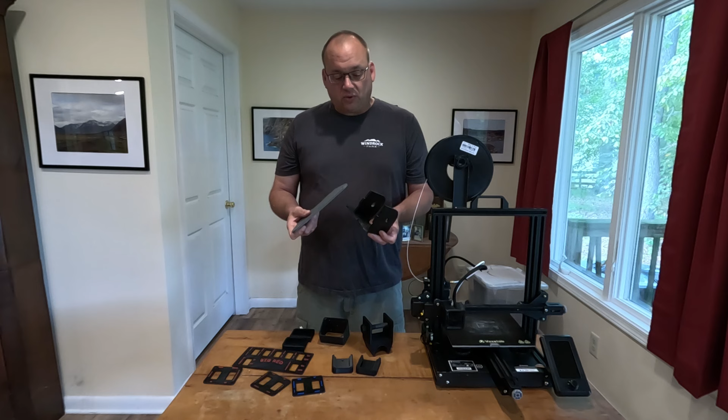More mock-ups—like I said, anything you're trying out, and once again these are designs I'm not using anymore. But the neat thing is, before I could actually send these designs out to be laser cut, I can 3D print them and test fit, make sure bolt holes line up, and make sure the bracket works before I spend the money and time to send them out to get laser cut.

Another really neat one is I can make switch plates. These are actually pretty neat. This one I made for Big Red. I still haven't put it in, but it sure does look neat. You can do raised lettering and do lettering in different colors.

And that's actually another thing I'll tell you—even with this 3D printer I have right here, I actually printed this using my other machine. I have two; this is a small one, and I have a larger one. I had to print this one on my larger one. But you don't need a special dual extruder or dual filament machine to do two colors.

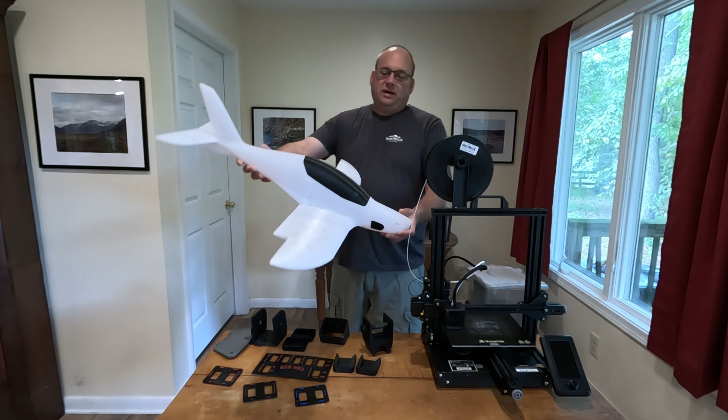And once again, another one—I was actually pushing my limits to see exactly what I can print, and I downloaded free files to 3D print a remote control airplane.

I never did finish it, but I really wanted to challenge myself on the complexity of the prints. So this is actually pretty neat. And of course I didn't print it in one piece, I had to print it in multiple pieces and glue them together. But this is just a real testament on how versatile these machines are and what they can do. When I say your imagination is your limit, I mean it truly is. You can really do a lot of neat stuff with this. But that was... maybe I'll finish that one day.

So now we're moving to the final part. I know you guys hopefully are amazed and impressed with everything you can do with this. And now, unfortunately, this is something that comes into everybody's mind these days: the cost.

Most of the time, technology, everything is incredibly expensive. My plasma table, which you've seen in other videos, is downright amazing and is actually one of the most affordable plasma tables you can get, and it was still a lot of money. Worth every penny though, but still a lot of money.

But for this one, actually this 3D printer right here is a replacement, because I've had another one identical to it, same manufacturer, more or less the same one. I've been using it for over a year and a half. I can't tell you how many pieces I have printed with that printer. I broke that printer probably about 3 or 4 times, and I burned the heating element out in the tip, so I finally just broke down and bought a replacement.

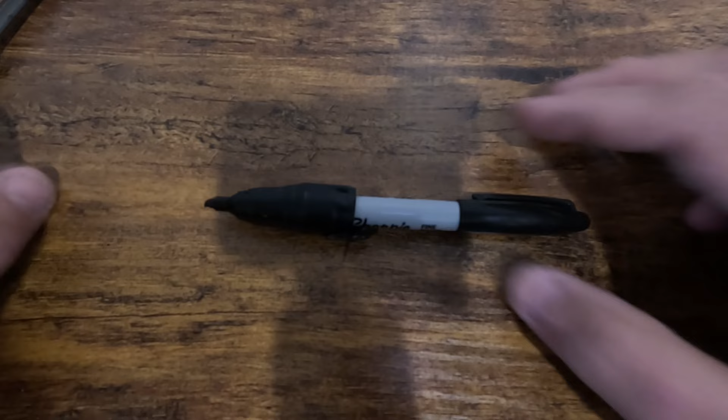All right, here we go. This is my idea. Well, if you watch the intro to this video and my others, you're going to notice that I use my CNC plasma cutter to actually use a Sharpie and draw on a piece of poster board. Now, this is how I did it. To get the Sharpie in there, all I did was wrap it with a lot of electrical tape to be able to hold the marker.

So now it worked, there's no denying that. But the biggest thing I was doing was verifying that the idea worked, that this is definitely not the best way to do it. It's not the final way to do it. But I just wanted to verify that, number one, I could hold a Sharpie, and I could write a G-code that I could actually draw on a piece of paper or anything else. Even though I made a pretty cool intro with it, I do have some other uses that, if you follow this channel, you'll probably see at one time or another.

So once again, that's the idea. Now I want to 3D print a part to hold the Sharpie. So we're going to set that aside. This is a Sharpie without tape on it. I want to be able to make a piece that goes on this section of the Sharpie that I can clamp in place of my plasma torch on my plasma cutter. So that's very doable, and that's what we can do.

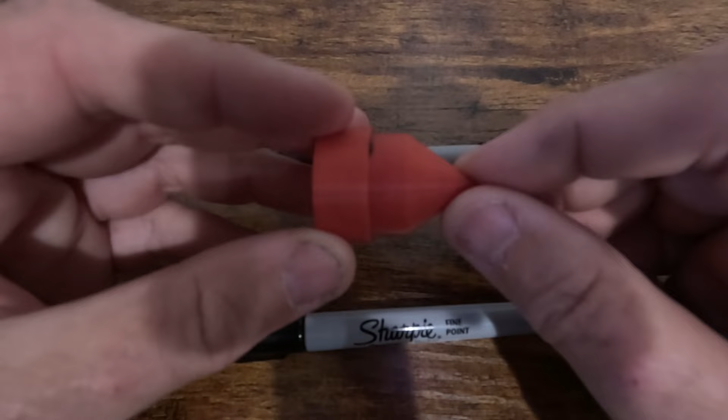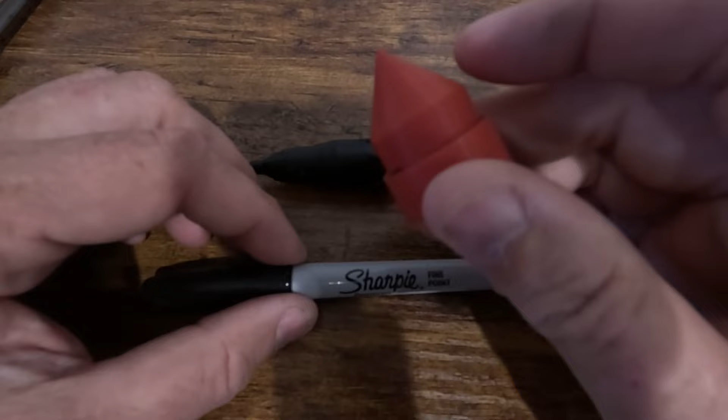So to start off with, I'm going to show you a few other parts that I've 3D printed. This is just a simple pointer. I actually clamped this into my plasma cutter, so I can use the point to line up a workpiece. So that's the purpose of this piece right here. I drew this up on CAD and I 3D printed it, and it works very well.

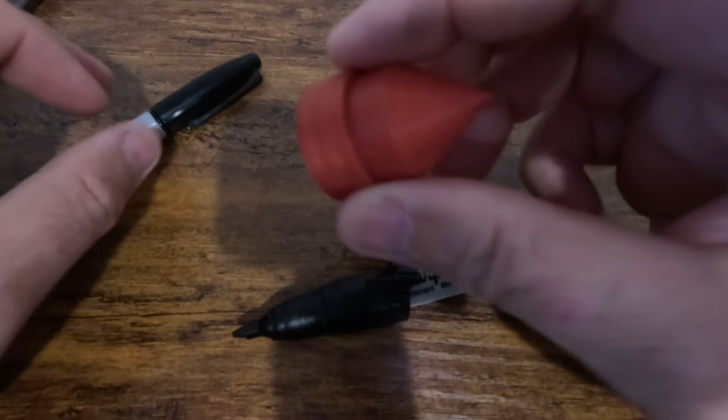So what we're going to end up doing is take this similar design. I'm going to take measurements off of this, and what we're going to do is stop this part right when it starts to taper down to a point. So it's only going to be about that long, and then we're going to put a hole in it, so the Sharpie can actually go through the center and the tip will come out the end. That's more or less what we're planning on making. I'm going to take measurements off of this because I know this fits in the holder for my plasma torch on my table, so this should work very well.

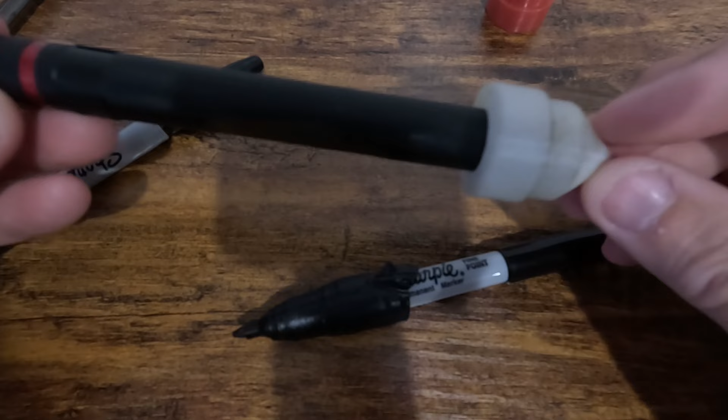And then here's another one that I made. I use this for the same purpose of aligning workpieces up on the plasma table. Basically all this is just a small flashlight, and what I can do is when I turn the light on, the tip lights up. It's a little hard to tell, but there's actually a hole in the middle of this.

So the hole lets light through, so I can put this in, and rather than having to line up this tip on the workpiece, I can shine a dot on the workpiece so I can center it up, or I can run a test pattern just so I can see exactly where it's going to cut. So I know if I'm too close to an edge or another part, I can do that before I actually light the torch up, run the program, and screw it up and waste a piece of metal.

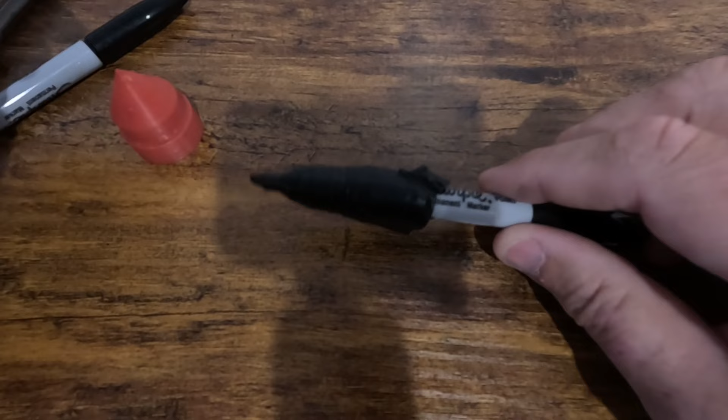So like I said, these were two items that I printed out on my 3D printer already. So, and then also, anyways, that's what we're gonna do. So we're gonna jump on the computer, get onto CAD, and we're gonna get it started.

All right, now that we're on the computer, let's get this party started. So we're gonna start. We're gonna open up Fusion 360, which I already had it open, and if you've never used Fusion 360 before, I do have a video posted where I gave a very brief introductory tutorial on how to use Fusion 360. So if you've never used it, I highly recommend you go check that video out, and it'll help you a lot in this.

But getting right into it, we're going to start a new sketch. We're going to choose the XY plane just because that's where we want it to print on. So, and we're going to start off by doing the circle for where the Sharpie goes into.

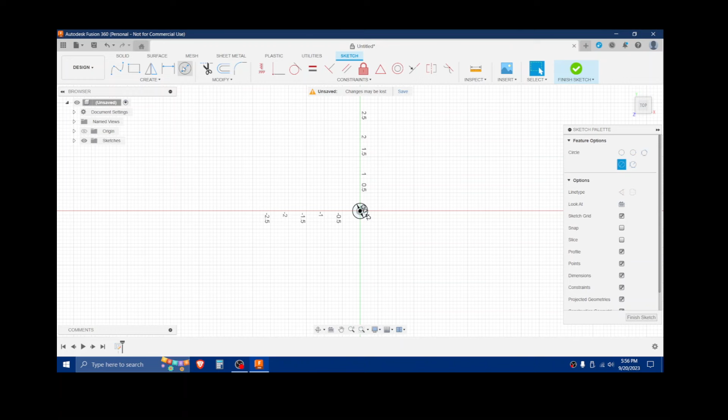Now, the next diameter we're going to need, and this is for the lower part of the shoulder, and this may seem confusing, but when we go to build the model, this will make a lot of sense. So now we're going to select another circle. We're going to take the same center point, and this is going to be 1 inch. So we're going to go 1 inch, and then the final diameter that we're going to use is going to be 1.15.

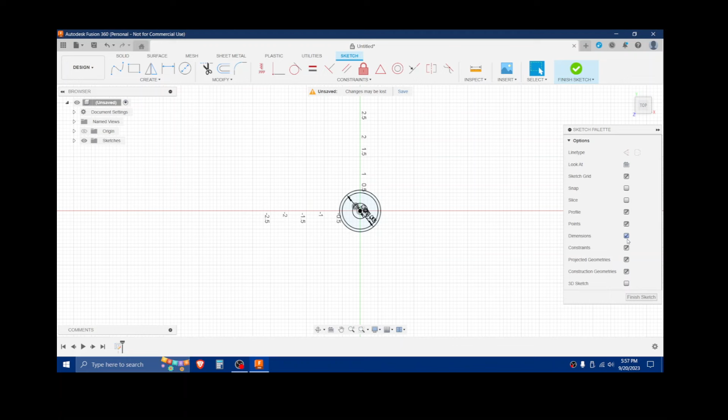All right, those are all the diameters that we're looking for, and I think I'll go ahead and turn off the dimensions so it doesn't look as confusing. Let me zoom in here a little bit. So here's our center hole where the Sharpie goes through, and then this is going to be 1 diameter, and then there's going to be a step so it can keep it square in the holder for the plasma table, and then that's going to be the outside diameter.

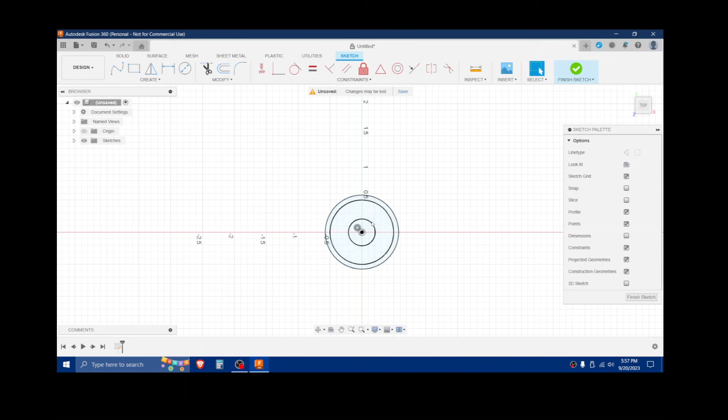So now we're finished with this sketch. So we're going to click up here to finish sketch. We do that. We're going to go back to home. We're going to press home. So we see in this dimension. So now we're going to go up here.

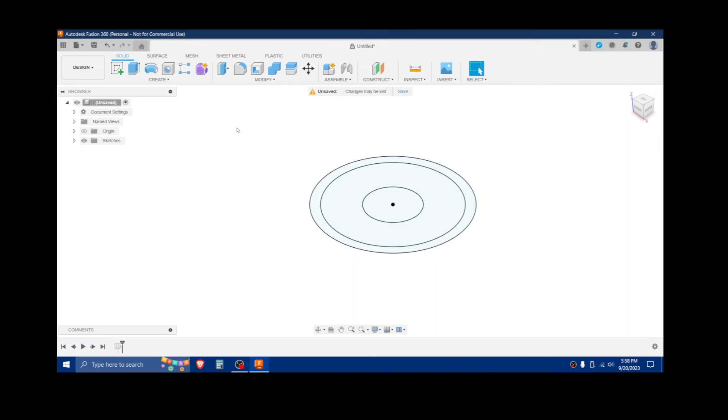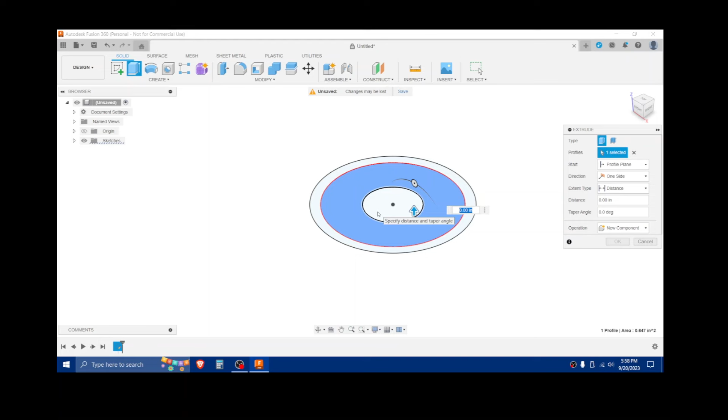You have this extrude key, but I'm going to use hotkey E, which is basically the E key on the keyboard. So we're going to go into extrude mode, and we're going to pick new component, and we're going to pick that section right there. And this is going to be the full height of what we're doing. So to extrude this, you can grab this arrow, you can move it up, down, whichever you want to do.

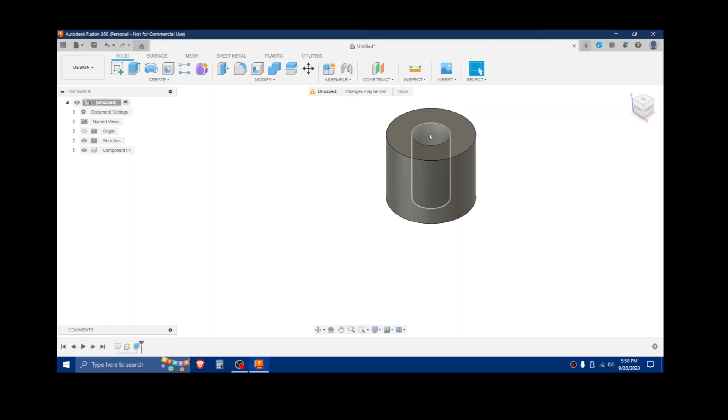But we're going up, and that dimension is going to be 0.85 inches. That's the maximum height of it. So we just drew a cylinder with a hole in the middle right now. So that's where the Sharpie is going to go through that hole.

Now this is a feature that Fusion does whenever you create the first extrusion - if you come over here into sketches, it hits the little eyeball right there and it turns the sketch off on you the first time you do it. So now we got to turn that back on.

So now we're going to make the outer body of this, so we have our little ledge that can get squared up into the plasma table. So right now we're going to go hotkey E, we're going to do extrude again, and now we're going to hit this. Now I'm going to go ahead and move this up a little bit.

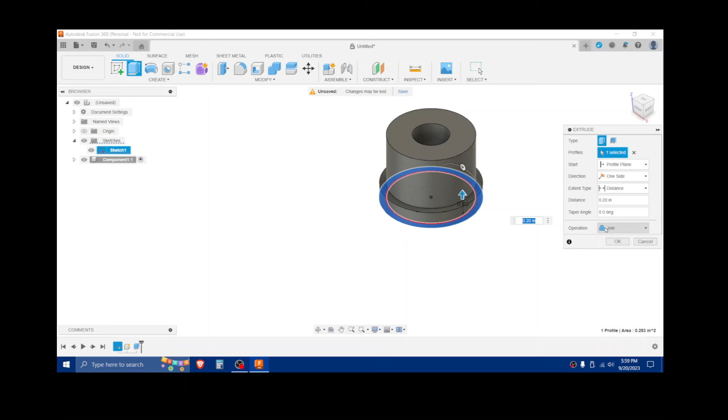Instead of doing a new body or component, it says join, because it's going to join this into the one we made earlier. So they're actually going to be considered one piece of the same component. There's a lot of tricks you can do with this depending on what you're doing, but we're making one piece, so we're just going to join it so it all makes the same.

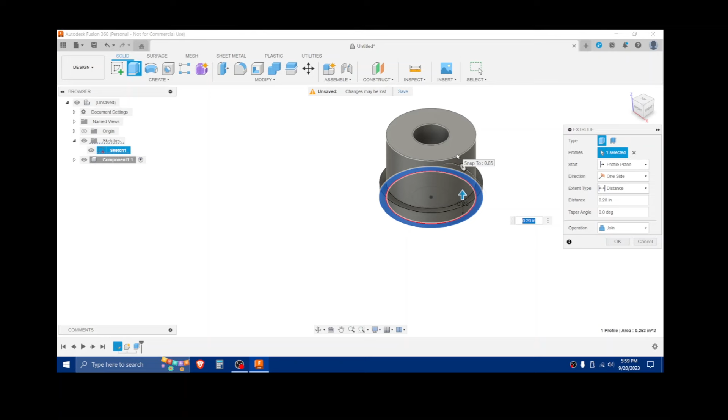Now the height, that's going to be a half inch, 0.5 inches. Enter, and boom, there we go. Now I'm going to turn my sketch off so it doesn't look confusing, and that is about what we're looking for.

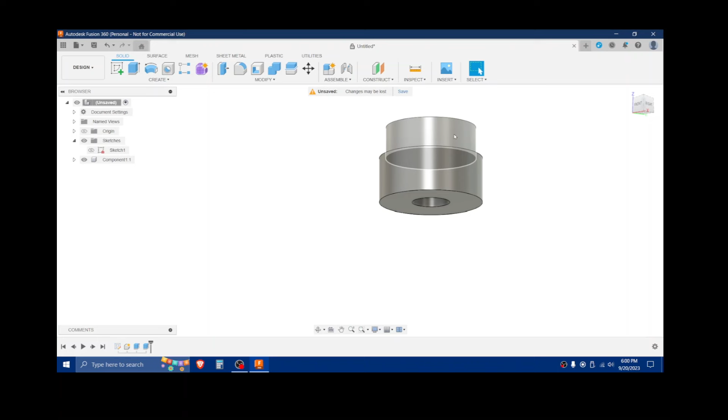That's pretty simple. This section right up here is going to clamp into the clamp for the plasma torch, and then this shoulder, this face right here is going to square it up on the holder. It should actually work pretty well.

So that's basically what we're looking for, but there's still a few changes that I want to do. I'm going to leave this a nice sharp edge, just because it's right against where we want it square, so we're going to leave that. The sharp edge up there, I'm going to leave that too, just no big reason.

But this edge right here, I want to round that off a little bit. So basically we're going to go up here, if you remember from our tutorial on how to do a sketch, you had a fillet function. Well, in the 3D modeling aspect of it, you do have the fillet as well.

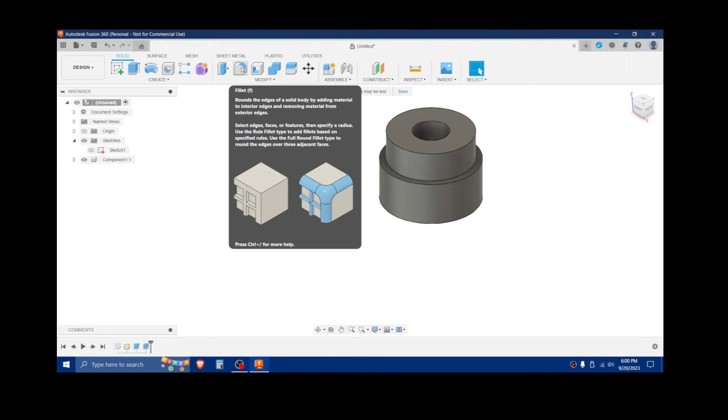You're going to click that, and basically you can see how I'm going to highlight that little edge right there. Then when I click it, then I have my arrow, and I'm actually going to readjust the model just so I can see that arrow, and what you can do is run it in, run it out, and you just really set this to something that looks appealing to you.

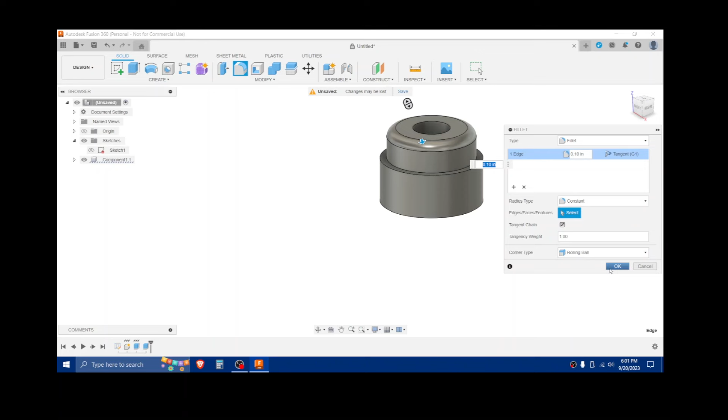We could go all the way like that, but I'm not going to do that. I need something for the clamp to hold on to. So we're just going to do 1/10 of an inch. That'll round it off, make it look nice, and we still have something to clamp onto. So then you click OK, and we're there.

So that's looking pretty good. Now, there is another feature that I want to add to this, because when we print it and I put the Sharpie in there, the Sharpie is going to be going from, this is actually upside down, it'll be going from the top, and I want to be able to clamp down on the Sharpie so when it puts it down, it doesn't push the Sharpie out, so it keeps a little bit of pressure on whatever I'm drawing on.

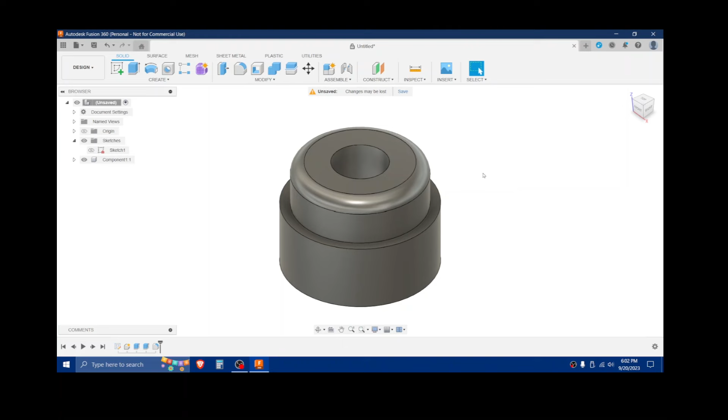So what I want to do is put a slit. We'll go to the top view right here, I want to put a slit right here so it's not a continuous circle. So when I clamp it down in the clamp for the plasma torch, it'll actually compress this piece and clamp it down tight on the Sharpie. So in order to make this so it'll move, I need to put a little gap in there, and we're going to put about a 1/16 of an inch gap.

So now how we're going to do this, and this will give me an opportunity to show you once again how creating a sketch and 3D modeling all works together. So we're going to come up here and we're going to say we're going to create a sketch. We're creating a new sketch.

Now you see down here, if you remember when I started the original one, when I chose the XY plane, those are right here in the middle. So if I go to home, there are my 3 planes that I can select and start on that particular plane. But I'm going to do this a little different.

Because if you see how I highlight this section right here, I'm going to select that plane on top of the model of where I'm going to put my sketch.

Telemarketer, don't mind that. So, yeah, all right, back to where, so when I highlight this, I'll put the sketch.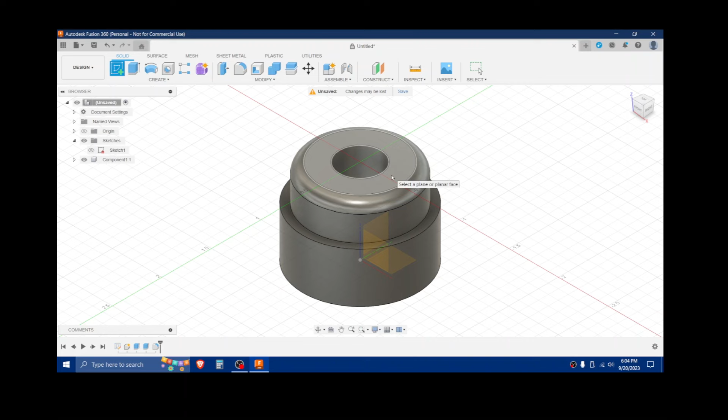So I'm going to left click on that, and I've created my new sketch. Now I'm going to put a 1/16 of an inch gap here, and there's many ways you can do this, this is just the way I'm doing it. I'm going to turn the original sketch on so I can center off that center piece.

I'm going to draw a rectangle, starting in the center, and draw out past the edge of the workpiece. That's going to be 0.6 inches, which takes us out and beyond. I'll hit the tab key, now we come to the width, and the width is going to be 0.031, which is half of a 1/16 of an inch.

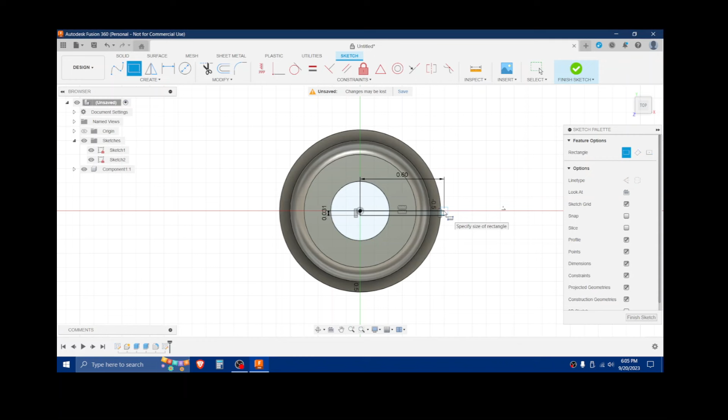So that's one. Now I'm going to draw another rectangle, and as I said, there's many ways to do this, this is just the way I like to do it. So we come out here, touch that on the square, then come up, and it's going to keep the projected geometry, so they're both going to be 0.6 inches long. Now I have it highlighted, and it's going to be 0.031 again, so now I have the total width of a 16th of an inch.

So now I need to clean this up a little bit. I'm going to come up here to the trim feature, and I'm going to trim that and that. Every time it intersects a portion of the model, it creates a construction line. So I'm going to trim that and that, and now we have our 16th. I'll hit the escape key to cancel the trim feature, and now we have our sketch.

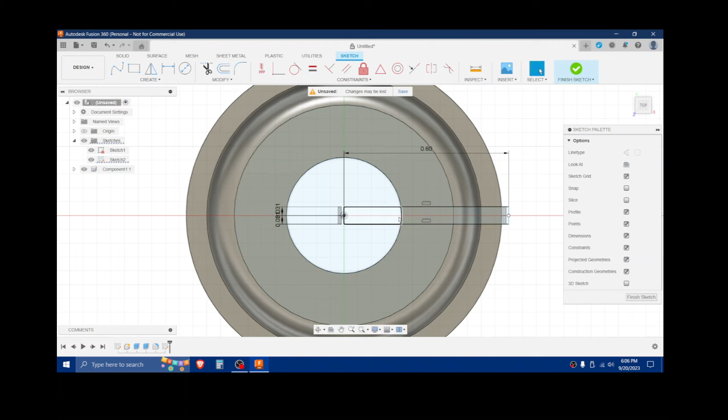So once again, I'm going to finish sketch. That's done, now I'm going to press the home key. Now watch this, I'm going to turn our component off, so now you see our original sketch, and this is how the other sketch is on a higher plane. It's Z plus 0.85 inches above the original sketch because I chose the plane on top of the model.

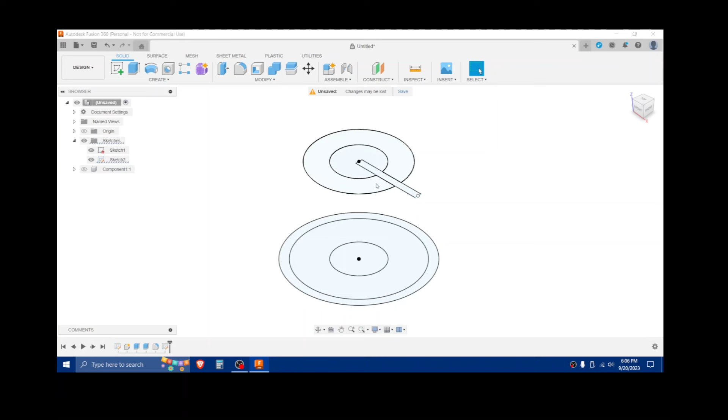So when you're building a model, depending on the shape, I could actually do a sketch and make an addition to the model on top of that. But that's more advanced stuff, that's for another video. I just wanted to show you how the second sketch was on an offset plane to the original one.

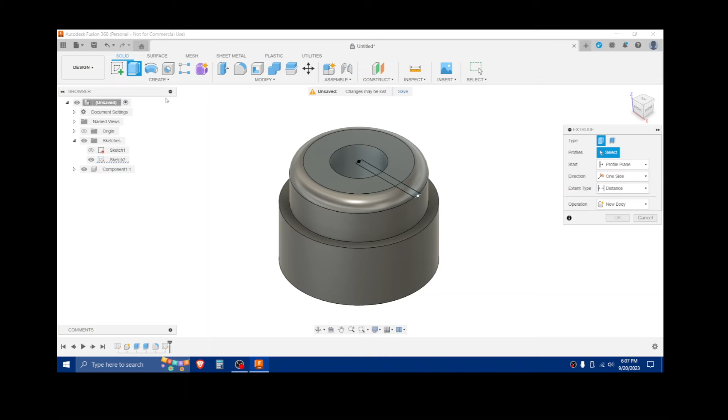So now we're going to show you how we can use this sketch. We'll turn the component back on, and turn the first sketch off just because we can. Now we're going to do the hotkey E again, or the extrude as you see up here, and we're going to select different parts of that sketch. We don't have to select this middle one, but I'm doing it just because I can.

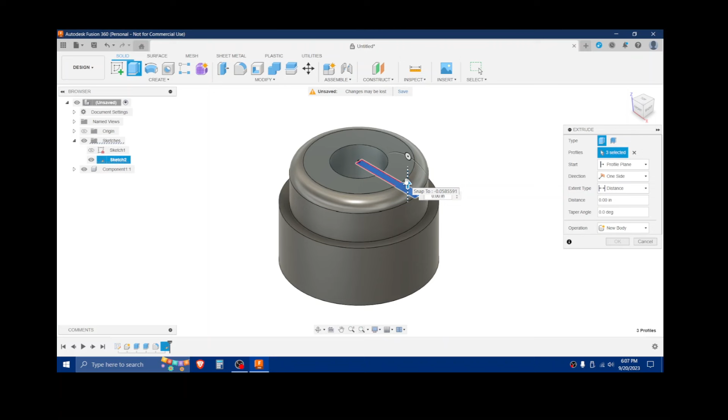So now that you see it highlighted, it says new body, and if we take this arrow and draw it up, it'll create that rectangle exactly how we placed it. But that's not what we're doing. So instead, we're going to take this arrow, go down, and it's going to turn red. See how it turned red?

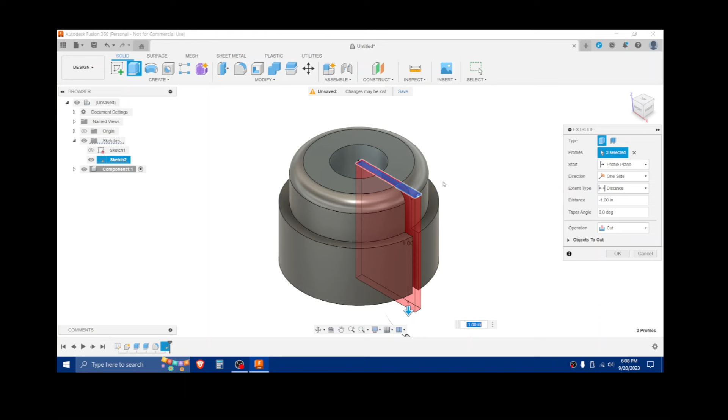Red is cut. As you see over here on the right, the operation will actually cut your model. So that's how we're making the 16th of an inch gap in the model that we're doing. Now we'll click OK, and voila, our model is complete, we have the split in it. So once again, we can clamp this into the plasma table, and it'll actually pinch on that Sharpie, so it'll keep it nice and tight so it can't come loose.

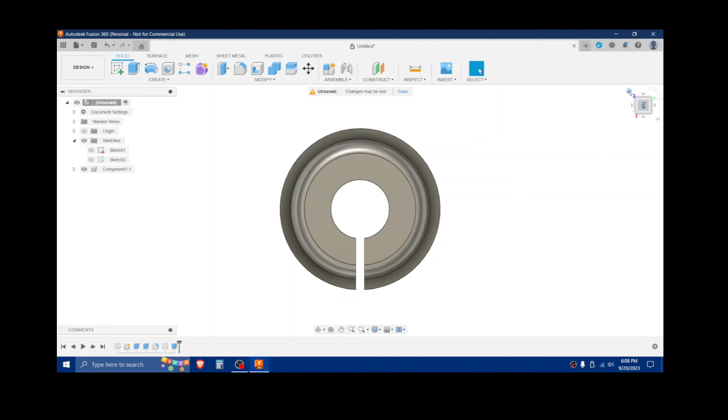So I'm pretty happy with that. All right, so now that we have our model, now we need to save this.

How you save your files is up to you. I do all my designs with a number, so this is number 145, and I do different things with the number in my category and classifications.

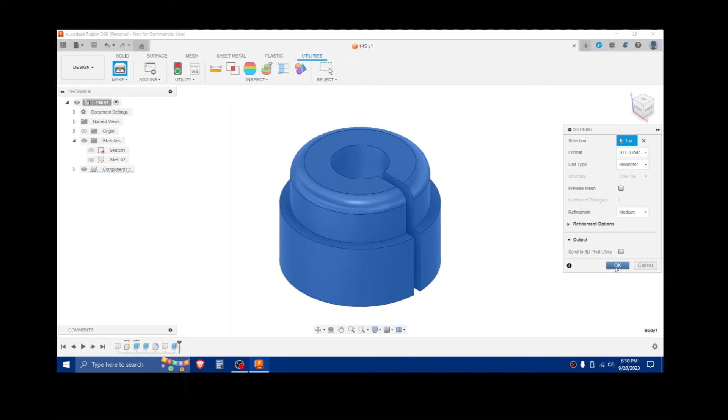So we're going to come up here - it says Body 1, we're going to change that. I'm going to put my design number, and like I said, the design number is because if I find the file anywhere in the computer and it has a number like this, I can look up in my archives in CAD in Fusion 360 and see exactly what that file is.

So that's the STL file, and it's saving to the folder that I want. I have different folders for different tasks. So I'm going to click save. So that has now saved that as an STL file, and I'm going to close this window down.

Whoops, let me just bring that back for a second. So now that we've saved it as an STL file, now we have to convert it to a file that the 3D printer can understand, and they understand G-code.

And G-code is a whole language in itself, and I'm going to leave that topic to somebody who's a lot smarter than I am. But anyways, we have to convert this into a G-code.

Basically what it is, we're going to be using what's called a slicer program. I'm going to show you more detail on this when I get into it.

But if you think about it, each layer that the 3D printer prints is about 8/1,000 of an inch. So basically it's going to slice every bit of this, like slicing a cake horizontally, and each layer is 8/1,000 of an inch thick, all the way to the top, so it can match the contours of everything.

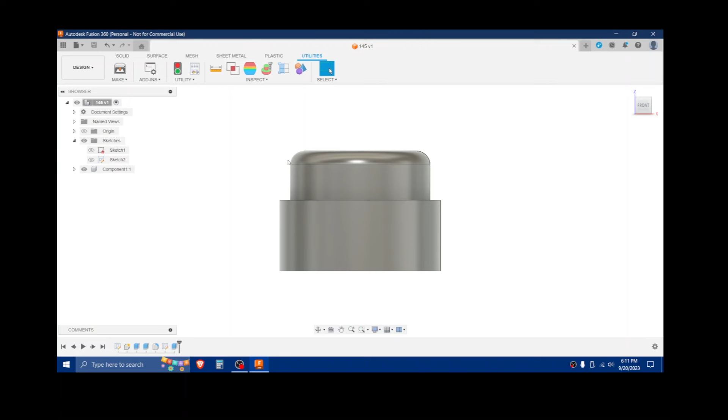So that's what we're going to get ready to do. We're going to use what's called a slicer program, and there's a lot of cool stuff you can do with this, but we're going to keep this simple. We're going to use the factory slicer for my 3D printer, Voxelmaker.

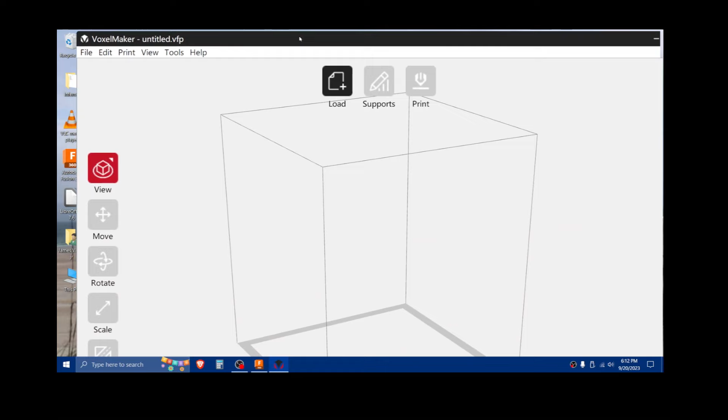I'm going to go ahead and open this program. And I apologize if I have any display issues, because unfortunately I have a gigantic 34-inch screen monitor here in the office, and I have to size it down just so I can get video-friendly images on it.

So anyway, this is the slicer program. There's many out there, this is very simple. This is designed for the one I'm using. The G-code you can make generally works on most all of them.

But if you want to do some advanced features, like doing the switch panels, I have to use a different program. That's going to be for another video.

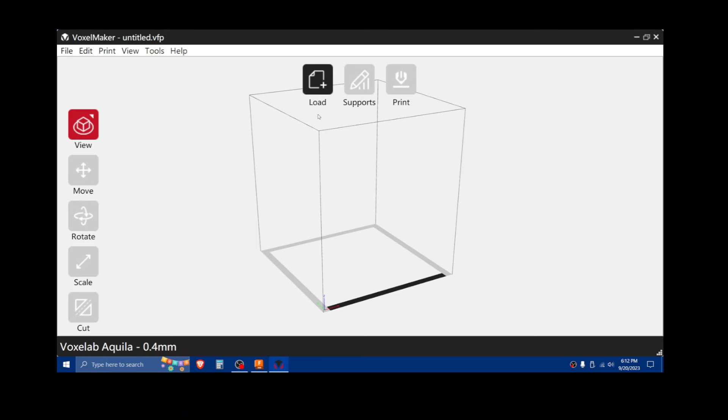So now we're going to go ahead and load. This is already set up, this is just the folder I always use. I have a specific work path my files go through. There's the 145, so I know that's what we just designed. I'll click that, click open, and there you go.

There's our part sitting in the middle of this. This right here is simulating our build plate, and this is where it's going to be 3D printed.

But yeah, I'm getting tongue-tied. Believe it or not, I'm actually still having a whole lot of fun doing this.

So anyways, the part is simulated, the part is on our build plate. You can move it around, rotate it. There's no need to do any of that on this one because it's right where we want it. If it was laying on its side, we could rotate it, we can move it. If you wanted to print 3 or 4 of these things, we can multiply them and you can print 3 or 4 at a time. But we're going to keep this nice and simple.

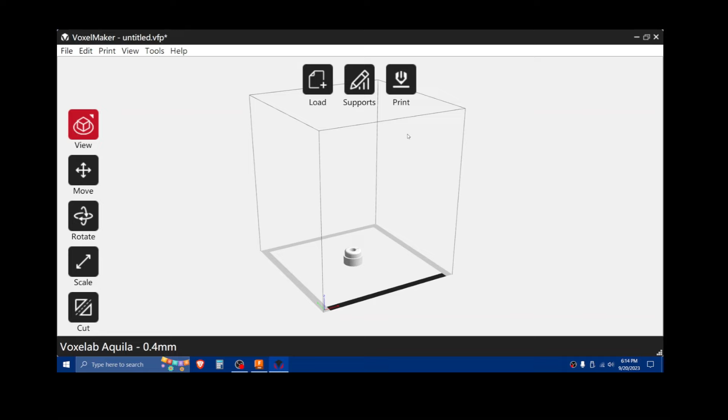So now that it's there, we're going to go to the print function, click print. We're going to do this solid just because we're going to put a little bit of clamping force on it. It's going to be sitting out in the garage in the heat, so I don't want it to distort or anything. So we're going to print it solid so we don't have any issues.

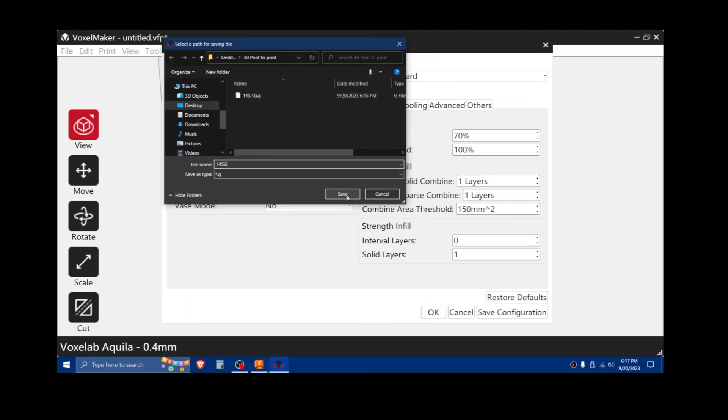But the honeycomb works great for most run-of-the-mill stuff. So once again we're going to go 145. I'm not going to do a 0.1 on it because it's the original design, and I always throw a G on the end, just so I know it's G-code, printer ready and easy to pick out amongst a list of other ones.

Now we're going to look up here. Instead of being a 39-minute print time, we have 1 hour and 8 minutes. It's going to use over 4 meters of filament. That's the longer time and more material just because it's solid instead of being honeycombed. The filament lasts a long time when it's honeycombed and not solid, you can actually save a lot of material.

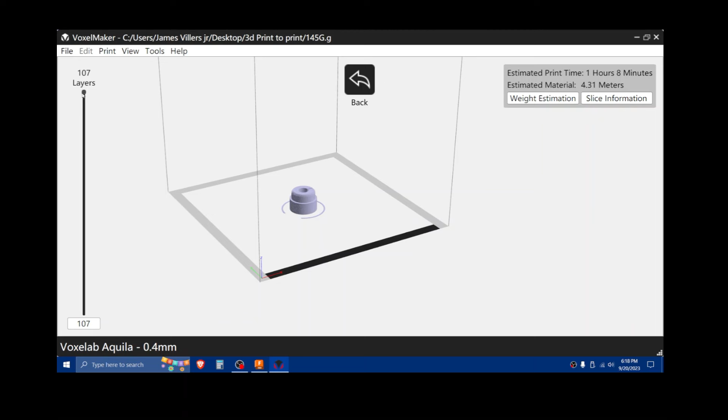So now you can see when I scroll down through the layers, you don't see the honeycomb anymore because it's going to print it solid, and that's how it's going to look when you print it out.

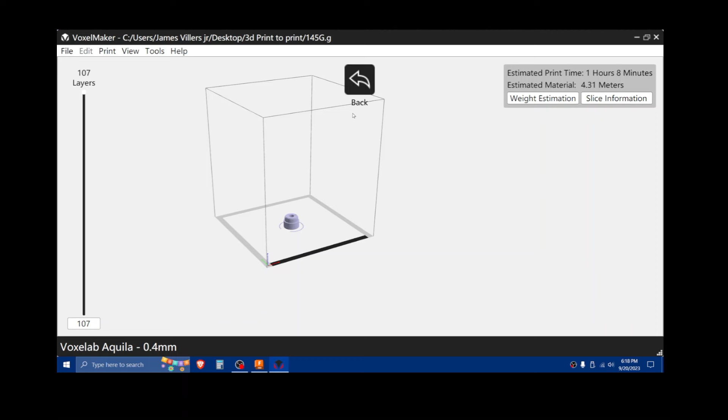So all right, that's all done, the G-code file's been made. So hit back and we're going to close this out. We don't need to save it because we're already done with that.

Here's the files we were working on. That's the STL file, the 145. There's a 145G, that's the file that's G-code ready. It's printer ready, ready to go.

I already have one of my USB drives inserted, an SD card. So this is the original file. I'm going to copy that, close that out, and come over to the SD card, right click, paste, boom. Alright, now the file's on the SD card.

Now we're going to jump off the computer. I'm going to get the camera back out and go set up the 3D printer, and we're going to print this thing. All this cartoon stuff we're playing with on the computer, we're going to turn it into a real item. So all right, close this all out, and I'll see you at the 3D printer.

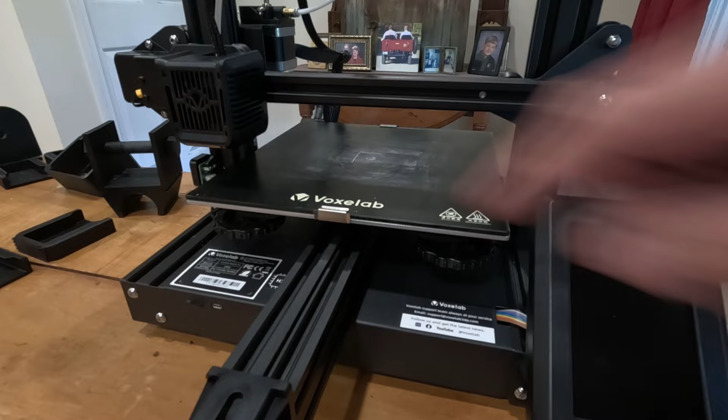All right, now we're out at the 3D printer. I've already put the SD card into the 3D printer, so now we're going to get ready to start the print.

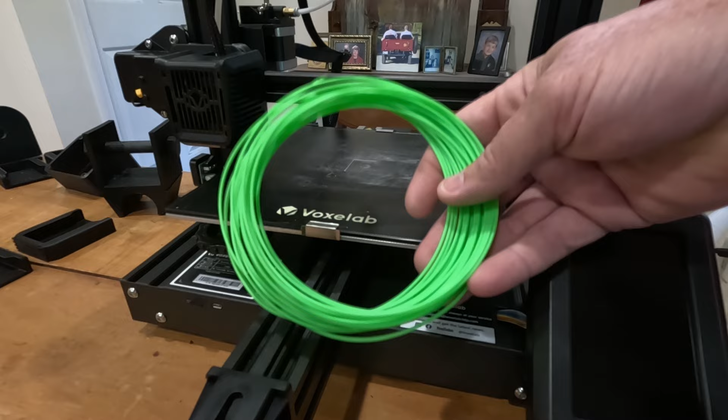The filament I decided to use is this fluorescent green filament. I've had this for a while. It came with a printer I bought, and I haven't used it for anything. I figured this would be the perfect time to use it, because anytime in any of my future videos, if you see this piece being used on my plasma table with a Sharpie, you'll know we made it right here.

So anyways, I'm not going to bore you. I got to load the filament, I got to level the print surface, and after I do that, I'm going to fire it up. I'm going to start a time lapse, and you can see the process in action. See you in a bit.

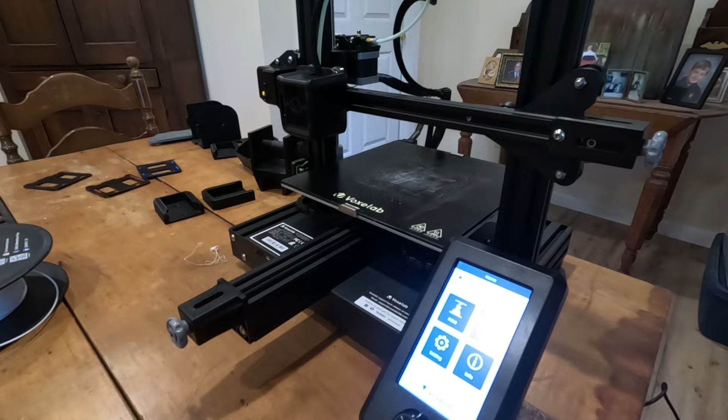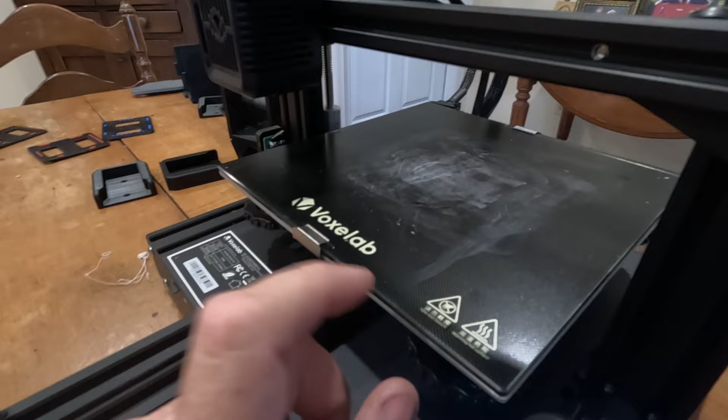Alright, I got my filament loaded, got the bed level, got the fluorescent green filament loaded in there for you. Just going to point out, getting ready to start, this is a glass build plate. I really like the glass build plates because when you print out, the first layer is dead flat, so that really turns out nice.

My larger one does have a plastic build plate backed by a piece of aluminum. Sometimes they get a little wavy on those things. Like I say, it's just what you got to deal with for being a larger one. So if I can print on the glass build plate, I like to do that.

In this white stuff you see here, getting the first layer to adhere is actually very important. Most of the glass build plates, you don't have too much issues, but I still like to put a little bit of Elmer's glue stick on the surface to make sure the first layer sticks. The plastic build plates, you have to use that every time. So just my experience, but we got that done.

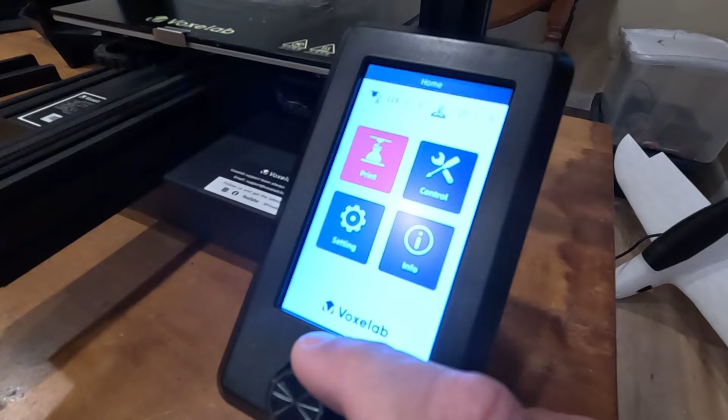We're ready to go. So what we're going to do is come down here, just select print, and you see right there, that's our file, the 145G. That's G-code ready, she's ready to go. So I'm going to click that, and we're starting.

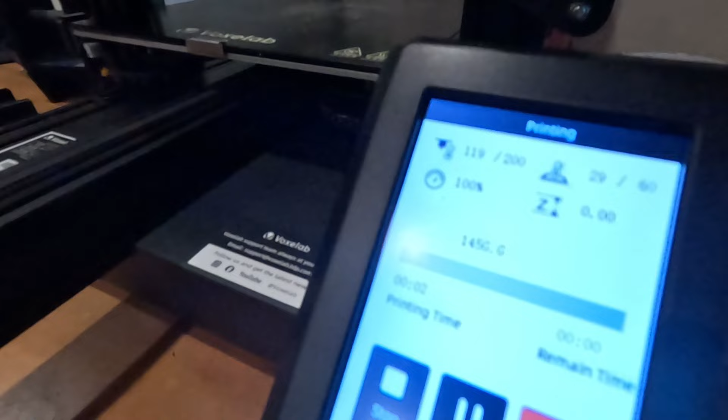So the printer actually goes to an auto home feature at this point, and it has to heat the nozzle and the bed up to temperature before it can start. Here's some of the information I have: that's your nozzle temperature, what the temperature is and what its target temperature is, and same with the bed temperature.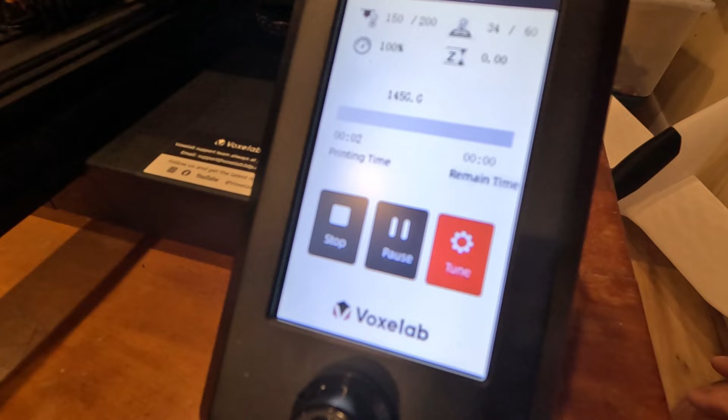There are some other settings, I won't go into too much more detail. Then it has a progress bar for how long it takes, but we know this is going to take about an hour. So I'm going to stop my yakking, and set the time lapse up so you can see this print.

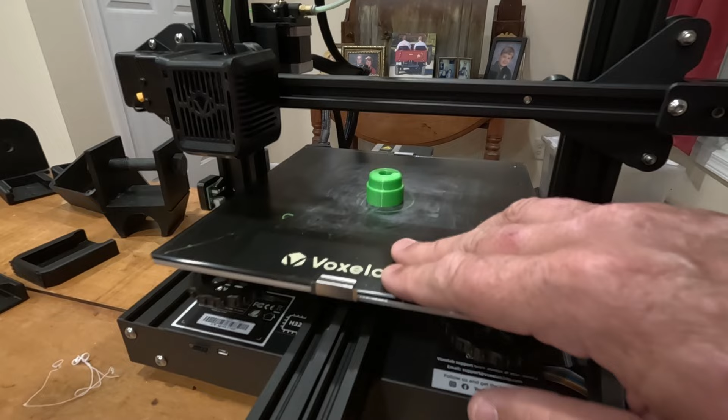Alright, I got to apologize that I lost the time lapse. My battery went dead in my GoPro, so I'm kind of working on borrowed time right now. See if the glue did its trick.

It was a little tight coming off, but this part looks good. Let's see how this fits. Wow, that looks perfect, I think this is going to work great. There's only one thing left to do - we need to go try it.

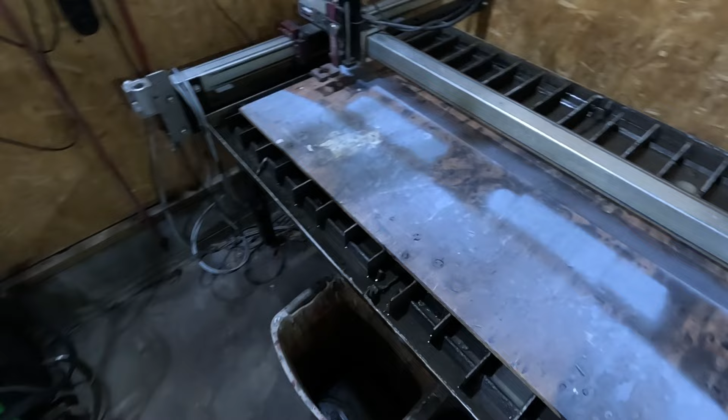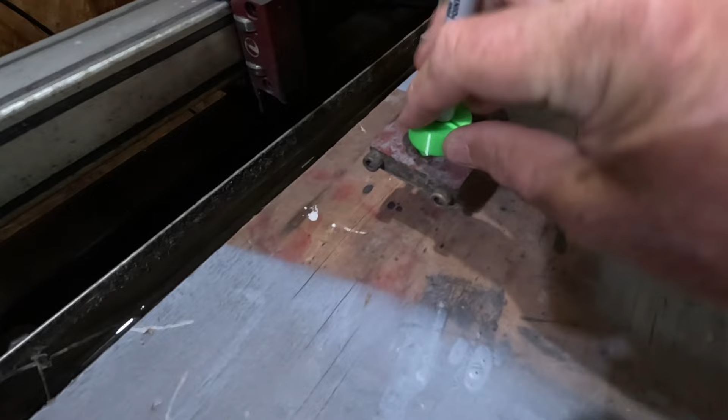Alright, we're now out in the shop, and we're going to see how this fits. That looks like that fits great. All I got to do is tighten those Allen screws up, and it should be good to go.

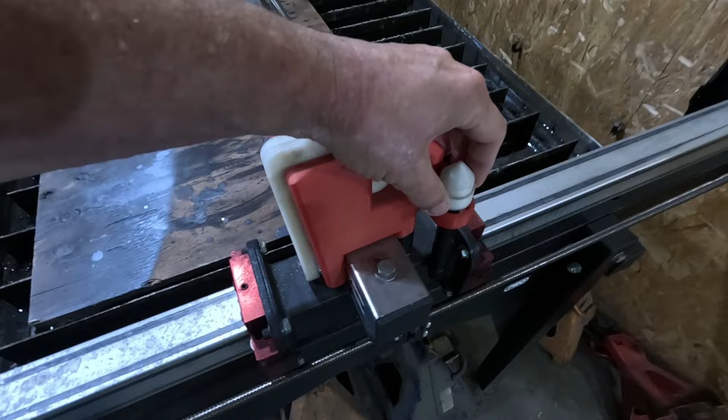And since I'm out here, I'll show you, when I talk about the limit is the imagination, here's the tools I showed you earlier. This is a setup I made for this plasma table. I made this mount. These are some alignment tools I 3D printed, which helps me line the workpiece up.

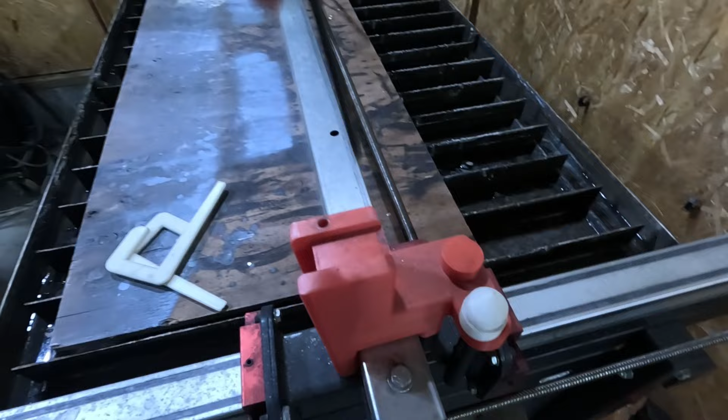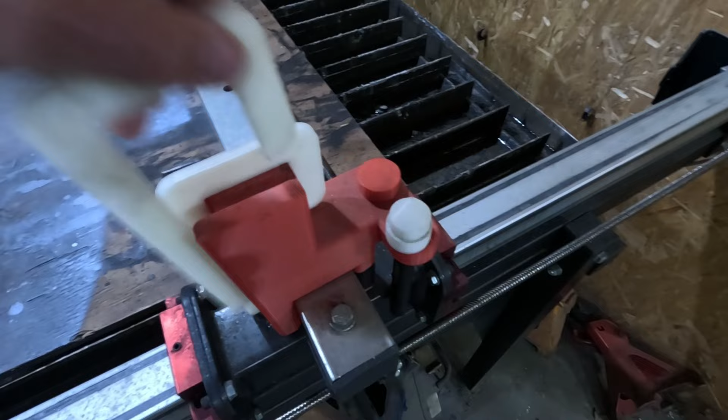And as I showed you inside, here's my lighted aligning tool, and here's the other one. I even have a little spot where I keep my Allen wrench I need just for when I change the plasma torch. So once again, that's why the 3D printers are a very invaluable tool, and you can do some really cool stuff with them.

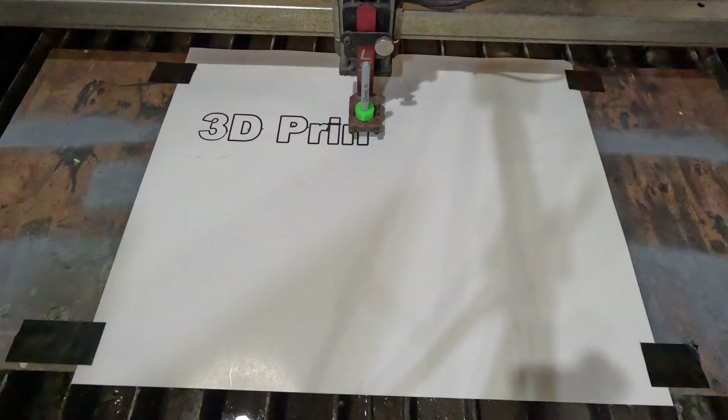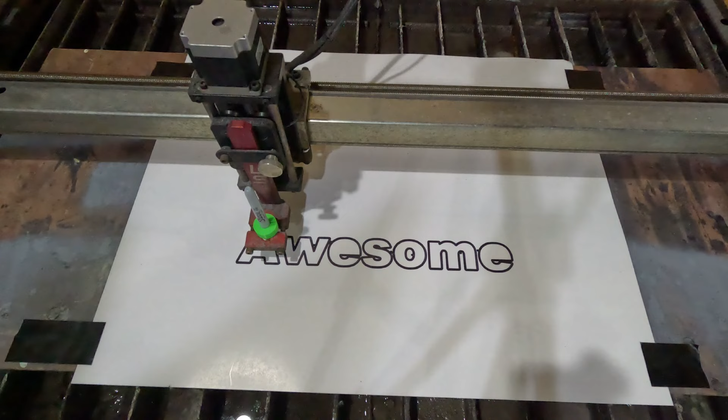I want to apologize for the long video. I had a lot of information I really wanted to pass along to you, and I hope my enthusiasm really shows on this topic, just because I've really enjoyed 3D printing. But thank you for sticking around this far in the video, sticking around to the end.